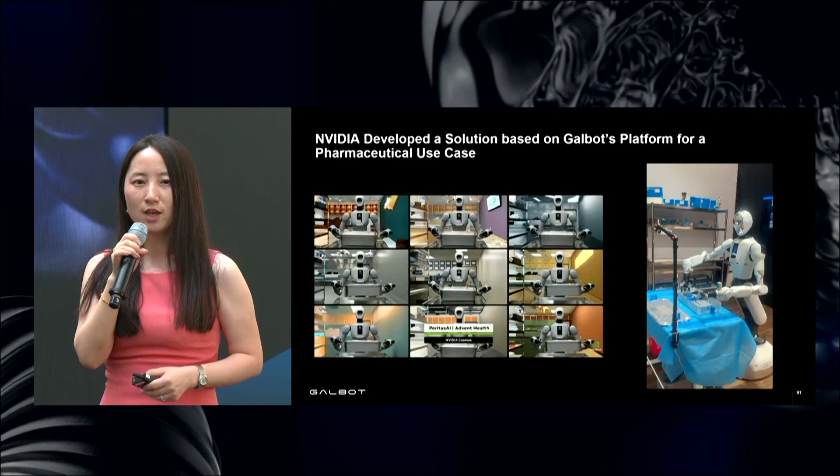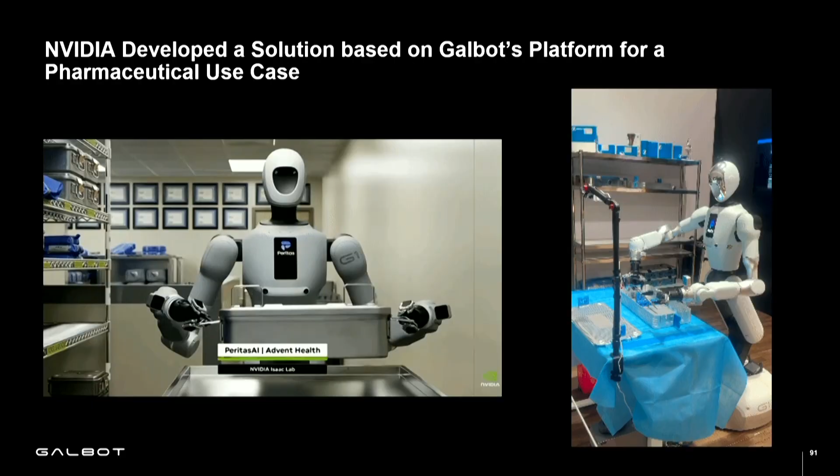So this is a very good example that besides the general skills we develop and train on our robot platform, we also open our platform and Galbot SDK to the vast amount of developers globally, especially for vertical use cases.

And a little bit of a recap for the roadmap of artificial intelligence. Remember how we got here today. First of all, we saw the AlphaGo moment, when artificial intelligence could play Go better than human beings. Then came the GPT-2 moment, which proposed a universal solution to all language tasks and scaled it up. And then the ChatGPT moment, which accomplished all language tasks and finally made it so AI could reason and talk, similar to a human being's level.

And now it becomes a more vast usage in our daily life. So when we look into the embodied AI's roadmap, we see a similar roadmap. We also see a more vertical use case, just like an AlphaGo moment. And then we are actually heading for a scaling up of the data in embodied AI, which drives to the GPT-2 moment. In the future, we are also looking forward to a robot that can have the reasoning and working capability similar to a human being level. That's what we call the ChatGPT moment for embodied AI.

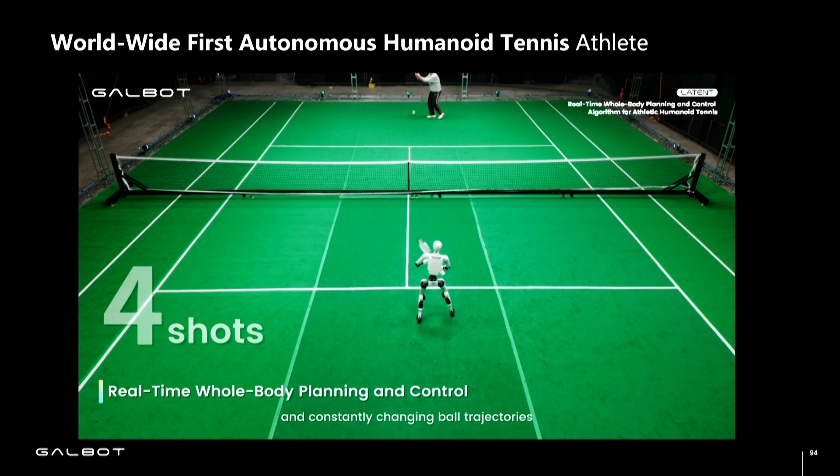So this is what we call an AlphaGo moment for humanoid. This is the world's first humanoid that can play tennis ball rally with a human being. This is a work that we released this March. The technology has already been updated since then, but it's still under confidential development. So I'm showing you here the initial version.

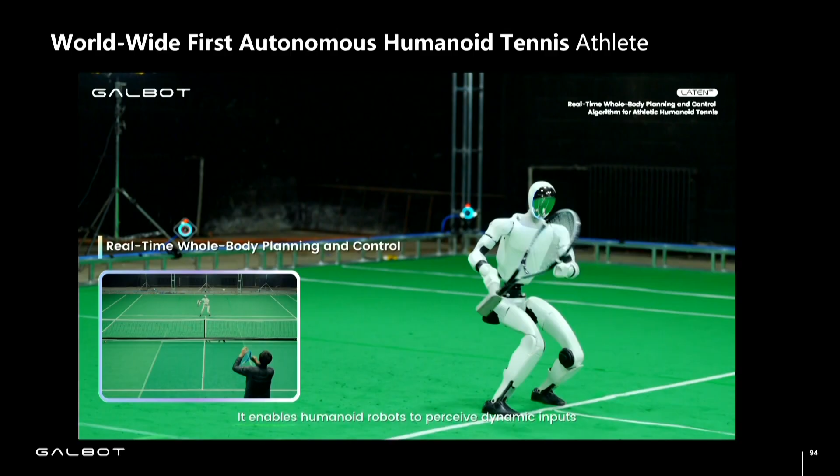In this video, you can see the work is 100% autonomous. The humanoid, driven by our foundation model, can play the tennis ball rally for at least 8 to 10 rounds with a human being. You need to see where the tennis ball is coming, think how it can run to the right direction and hit back the tennis ball. And also, if you play tennis, you know that if you don't catch the ball in the sweet spot of the paddle, you won't hit back good enough. So all of this is reasoned by the humanoid, by our foundation model, in real time.

This combines a low level of whole body control and also a high level of reasoning. So this is a very good example showing our work combining the cerebrum and the cerebellum together in a single foundation model. And this work has become viral on the internet.

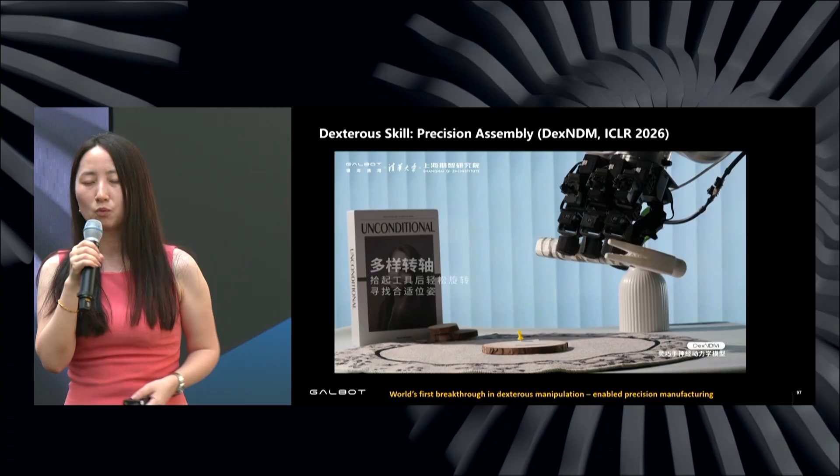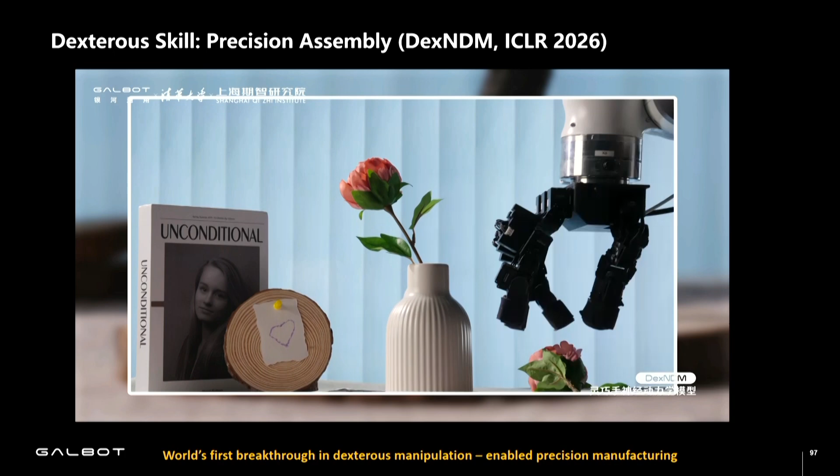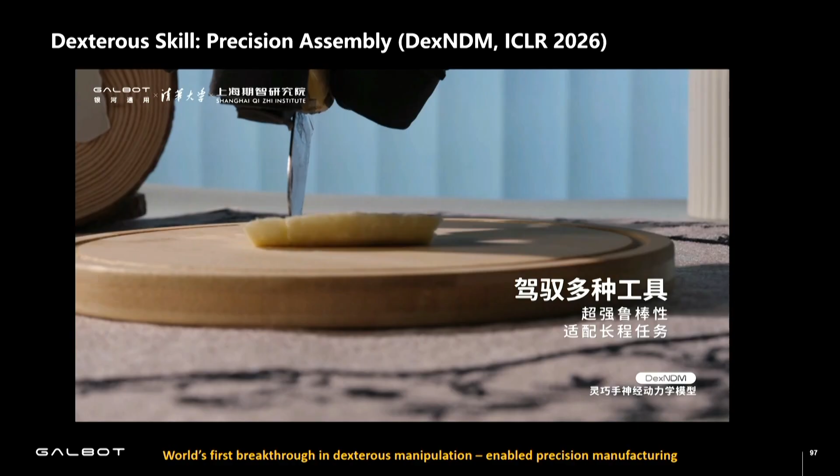Another work we have been doing on the cerebellum is that we released the world's first dexterous hand neurodynamic model. Before that, we all know dexterous hand manipulation is the most difficult work because there is no way to teleoperate it - it's called the pearl on the crown of humanoid. Driven by our foundation model, even an open source hand like Leap can handle different shapes, like complicated items, and freely rotate them in different directions, and also handle different tools on different items.

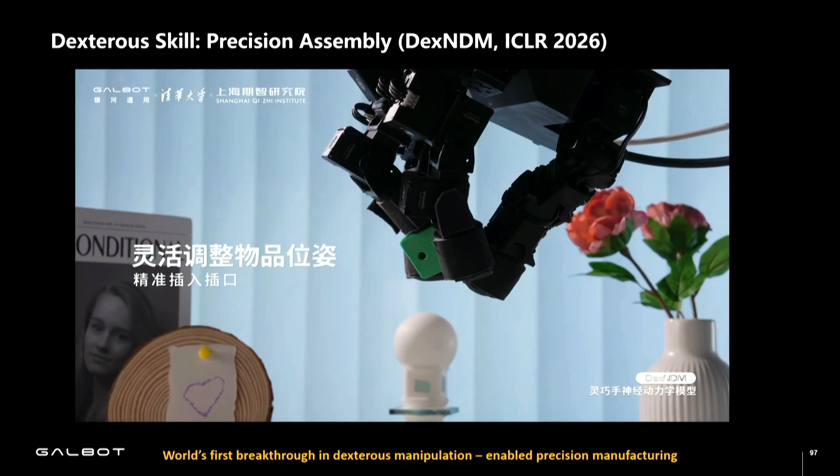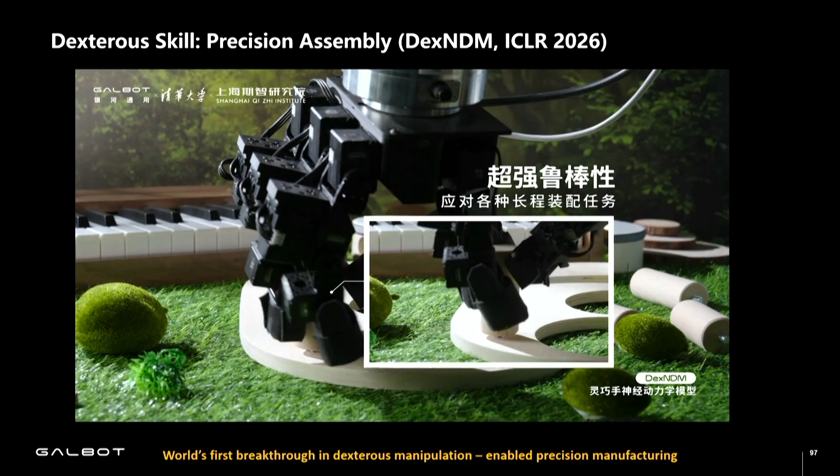You probably know that some dexterous hands can do some precision work, but as far as we know, all the traditional methods are based on pre-written trajectories. That means if the hand can use a screwdriver, and we change to another screwdriver, the traditional way will not work. So generalizability in dexterous hands is extremely hard. And we have proved that with our algorithm, the dexterous hand can handle different kinds of items.

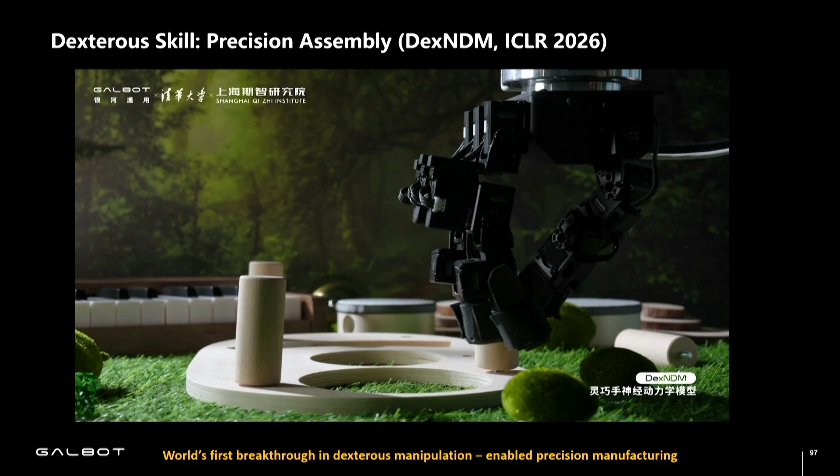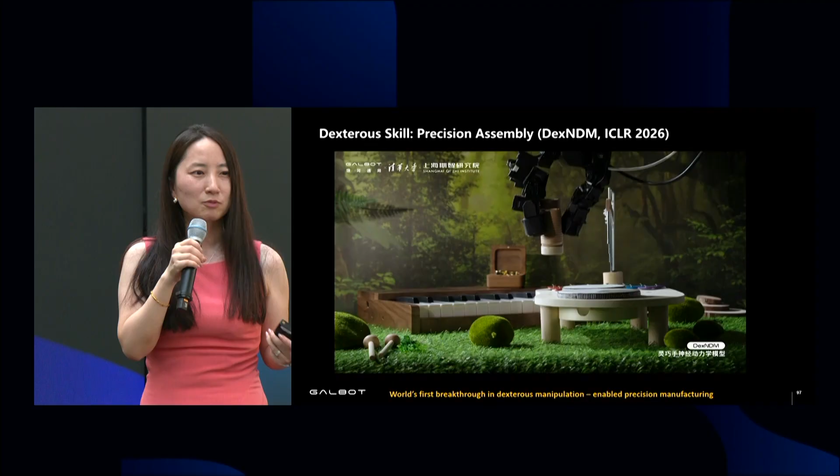And this year's Spring Festival, in February, we used the dexterous hand to spin two chestnuts in hand. The center of gravity of the two chestnuts is constantly changing, and there's no way to teleoperate it. The decision driven by our algorithm can rotate it, adapt to the different changing center of gravity, and rotate it freely.

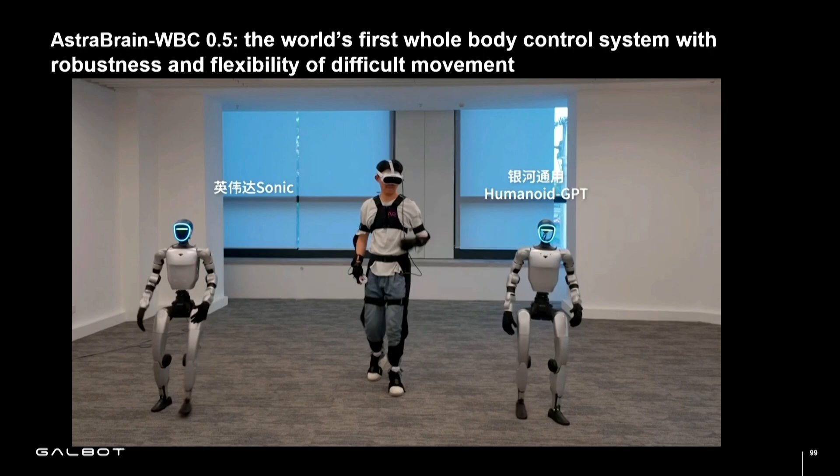This is another work that we released very recently, this May. This is what we call a foundation model for whole body control. We compare it with NVIDIA Sonic, and from the latency and smoothness level, you can see that our work achieves higher performance.

This work also leveraged the biggest human behavior data. We used 2 billion frames of human behavior data to train our model.

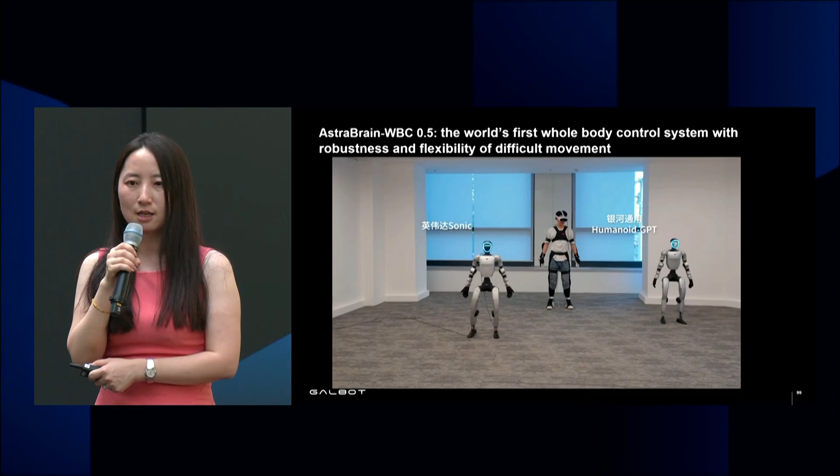One more thing we didn't show in this video: previously, for the humanoid to perform this kind of work, it needed two things. First, the pre-trained dataset needed to have this kind of movement before. In our model, we prove that we don't need to have the exact behavior trained. We can have new behavior performed with zero shot.

It proves the generalizability. Second, based on the original whole body control algorithm, there will be limits or constraints on movements that are hard for the humanoid to retain balance. For example, for a very hard movement like bouncing to the ground, the humanoid will be limited to reflect the exact movement. But compared with NVIDIA Sonic, we can do a more extreme movement. Even when the humanoid senses it's going to be forced to the ground, it can still remain balanced.

And this is another work, our latest work on world action model. Previously, we know that VLA model is more prevalent in foundation models for embodied AI. We also released our VLA model two years ago, which proved to have the highest success rate, 98%.

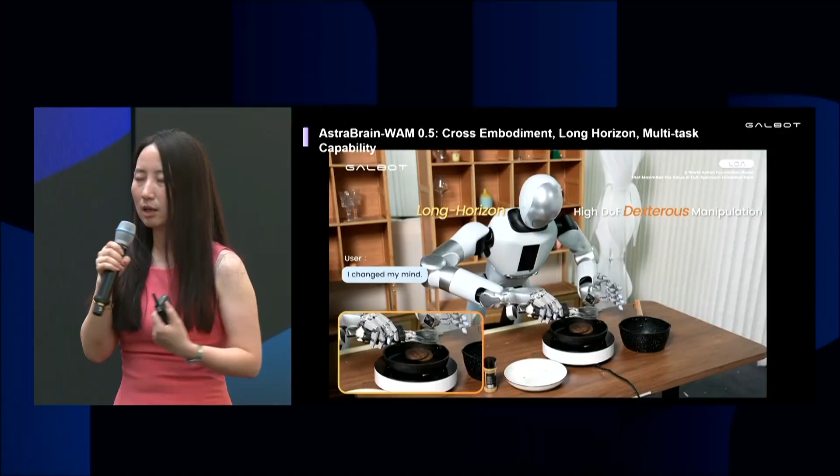We combined the advantage and our experience in the VLA model with the advantage and forecast of the world model. We released the first world action model last March, and this year we upgraded it for more long horizon and multitask ability. We call it AstraBrain World Action Model 0.5.

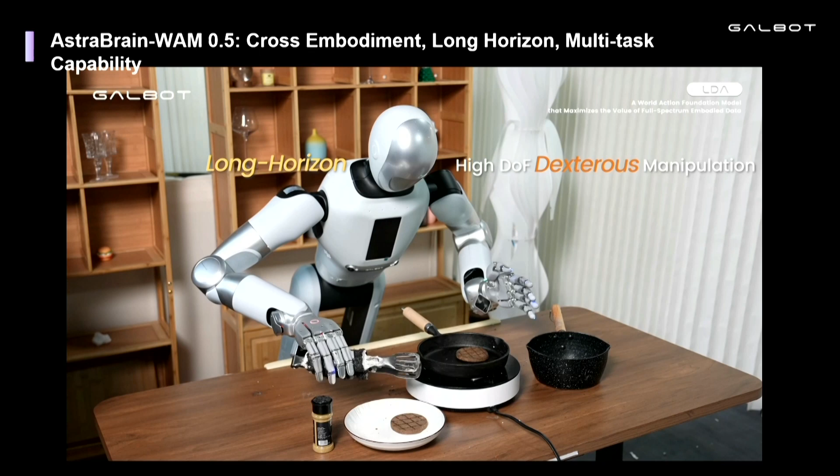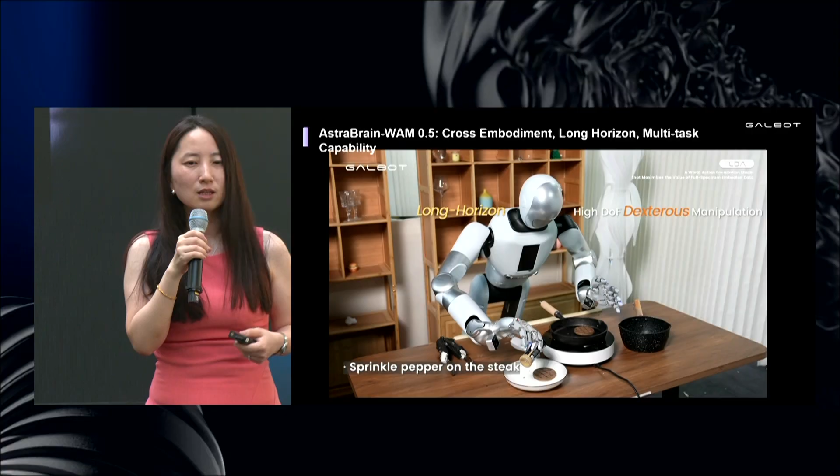Driven by this model, our robots can handle long horizon work like cooking in the kitchen, handling steaks, and even adding some flavor to the steak. Recently we showed a video on the website where our robot can cook breakfast and pour juice into a glass. Even when people try to interrupt the movement, it can still close the loop on the task.

This work can also work on different robot devices. We have proved cross embodiment not only on our long arm Galbot G1, but also on the short arm version, and also on the Unitree G1.

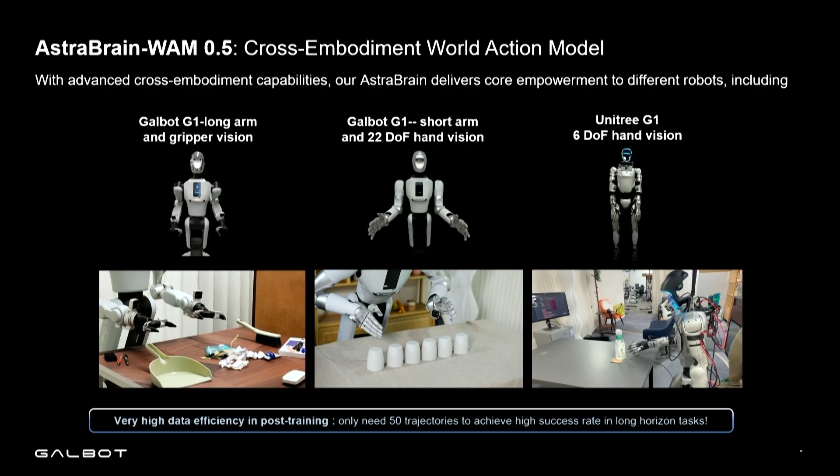This work has also leveraged a very small and light database. We only have 1.6 billion parameters, which means it can be easily deployed on the edge side for edge computing. Going forward, we are going to enlarge the data. So when we find a way to scale up the data, there will be a better approach to reach the ChatGPT moment in embodied AI.

For the world action model, we have also proved another significant breakthrough in this area. Previously in VLA, we leveraged expert behavior, which is high quality data.